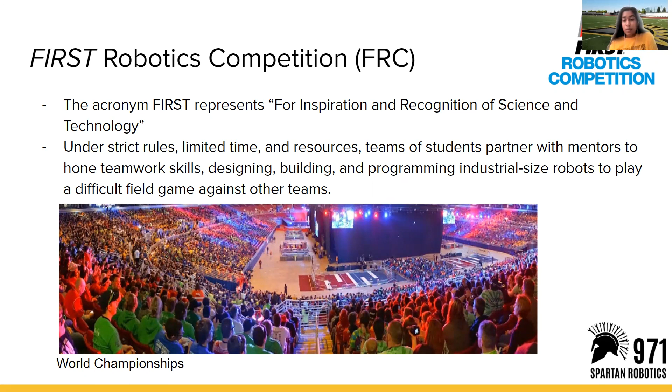Our school, Mountain View High School's FRC team is Team 971. Our team name is Spartan Robotics. 971 is a team number we were assigned by FIRST at the start of our rookie year in 2002. Currently, our team has about 30 students and 20 mentors. With all the hard work from within our team and with the support of our sponsors, some examples of them are NASA, Google, ORIS, Abbott, Lockheed Martin, SolidWorks, we are able to compete annually in about 6 competitions.

Every year, we get a new game that is generally played on a 26 by 54 foot field with an alliance of three 120-pound robots. This is our 2019 robot, nicknamed Tachyon, that we designed for the game that year.

The objective of the game was to put the orange balls seen in the picture inside the cargo ship and rockets, and then to place a hatch on the hull. At the end of the game, robots could choose to either not climb at all or climb to level 2 or 3, with 3 being the tallest and scoring the most points. In that year's game, we finished 4th overall.

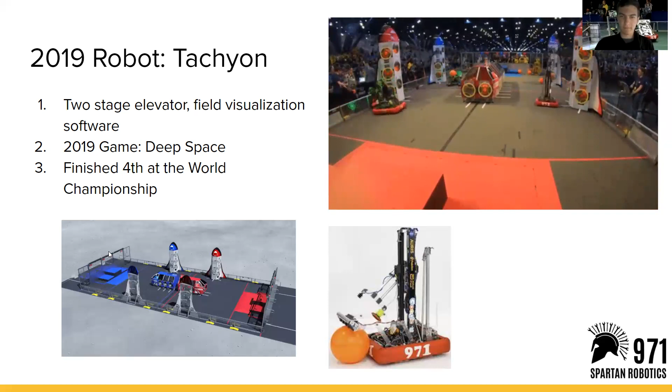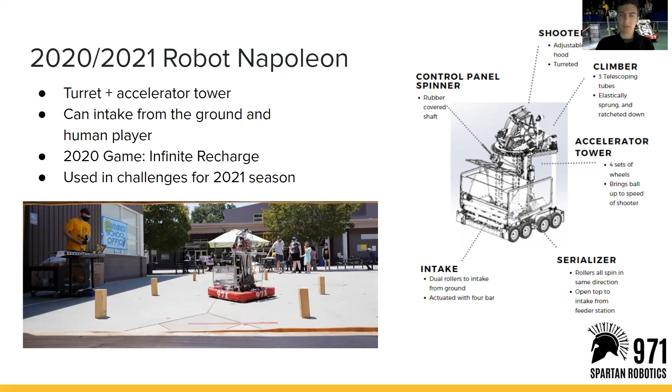Our team meets year-round, beginning with the official season, which goes from January through April. The official season begins with kickoff, during which the team gathers to watch FIRST reveal the year's game, and we begin planning our robot then. During the season, the team splits into specific groups to manage the various subsystems that are developed for the new robot. The robot is then developed in CAD and then built, preparing the team to compete at regional qualifiers to qualify and attend the championship competition.

After the championship, the team goes into the off-season from May to December, in which we build the third robot, which is named that because we build twin robots during the season. The third robot is a learning opportunity for newer members that join during the summer in the beginning of the school year. The off-season allows for the team to embrace these new members and provides countless opportunities for members of all grade levels to advance their skills.

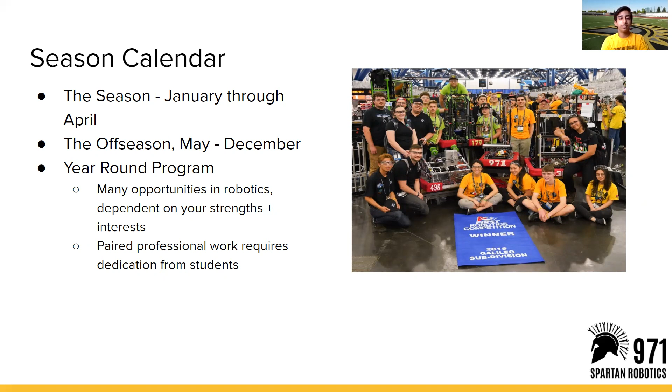So now we move on to our prototyping CAD stage. During this stage, we always start with brainstorming models and ideas of what features are necessary and what features we want. We first thoroughly research our game for that year, and based on the requirements and goals for the game, we start to list out different robot iterations to solve each in-game objective. After we gather a strong list of options, we filter the iterations until we are left with the most efficient and effective solutions to solve in-game obstacles.

After we determine feasible results, we first use CAD either in SolidWorks or Onshape to construct a 3D model draft of what we are building based on the ideas we discussed. Since we don't know which robot model is the best, we prototype different features on the robot to observe which one is the most compatible. During the prototyping stage, we manufacture our desired models based on our CAD using wood so that we can manufacture and assemble them easier without wasting resources and still produce accurate results.

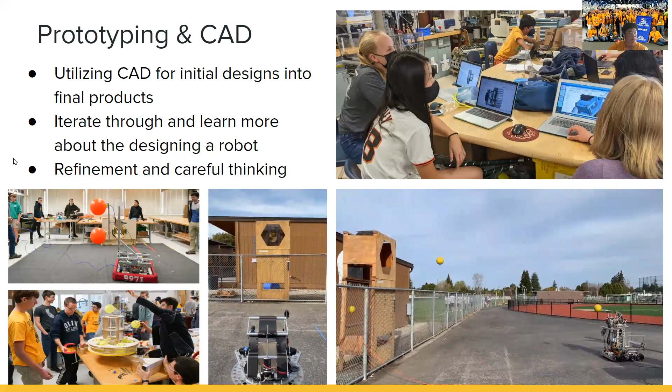So this is an example of the prototyping process of our 2020 to 2021 robot's shooter, also known as the Napoleon shooter. First, we prototyped the basic version of the flywheel to see if we could go forward with this idea, on the very left-hand side of the picture.

After we determined it was a good idea, we experimented with different surfaces on the flywheel hood and hood compression, changing different variations. We also added a tower to see if that increased accuracy. After that, we made different wheel configurations to optimize energy transfer between the motors.

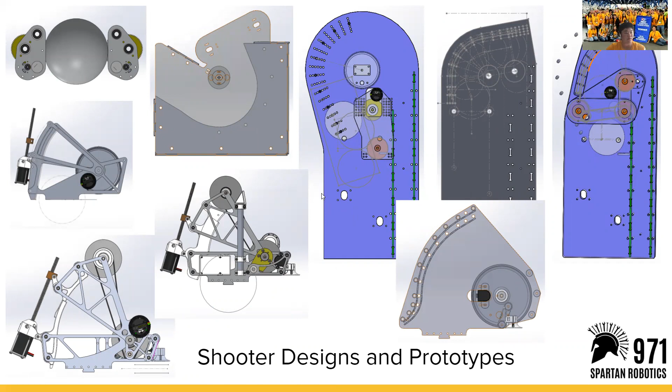After we finish creating a CAD model for a part, the next step is to fabricate it. We use a variety of machines to produce parts, including industrial grade CNC mills and routers, as well as 3D printers and lathes. We also do this under time-sensitive conditions, which prepares us for the real world, where there's constant pressure to perform to expectation.

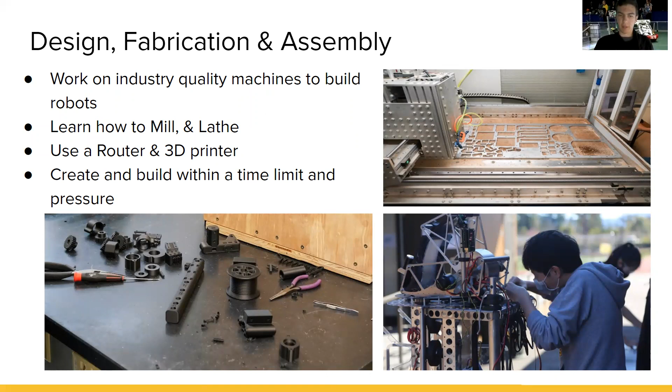Our team has an incredibly advanced software team. We use industry standard tools to build and deploy our code. This includes, but is not limited to, using Git, code reviews, and a re-implemented robot operating system to build and power the software components of our robots, which range from vision systems to autonomous systems. We even open source our code on GitHub, making software more accessible to other FRC teams and even major companies that use our code.

Although it is one of the most challenging aspects of the team, the industry professional mentors, many of whom built this team's software when they were students at Mountain View High School, collaborate and guide students to maximize their coding potential.

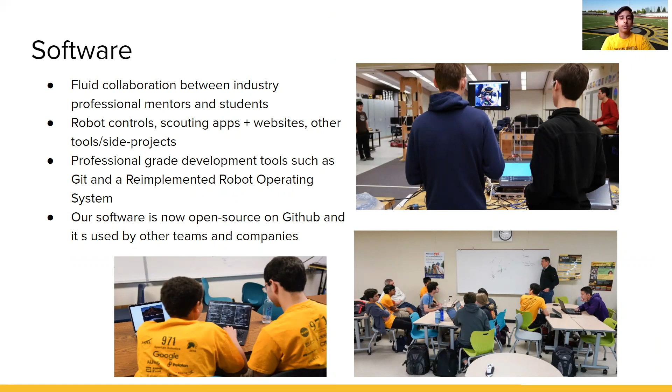So after software, we move on to competitions. These competitions are hosted after our 6-week build season, in the month of March. They are often very competitive and fast-paced, since around 30 to 50 teams come to one field to compete within 3 days. Our team often goes to 2 regional competitions, one in Silicon Valley and one in San Francisco.

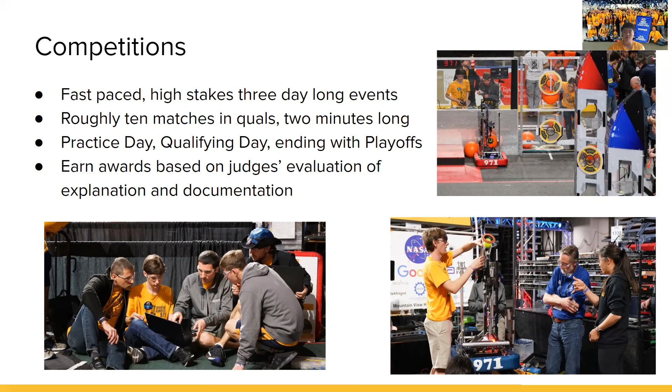However, if there are competitions that are filled, we fly to other states to compete. If we place first in one of the competitions or earn a qualifying award, we qualify to attend the championship event in Houston. However, in order to achieve promising results from these competitions, a major part which contributes to our success comes from scouting and strategy in our team.

These groups scout different robots during a competition using our team's integrated scouting website to record data. After we receive this data, we process the information and form strategies based on which robots from different teams perform well and which robots we want to recruit onto our alliance. Although this portion sometimes goes unrecognized, it is a very essential part which helps us place well in competitions.

For the championships, after our typical regional challenges, if we qualify for the championship tournament, we go to one of 2 events hosted in either Houston or Detroit. We go to the Houston competition to compete since it is in our regional division.

In this round robin tournament, there are 6 fields to play on, and the team that places first in each field moves up to the Einstein's competition, which consists of the 6 teams that place first and decides the world champion. These championships are well known and attract many teams from not only the US, but around the world. Our team has a strong history of often qualifying for these Houston championships.

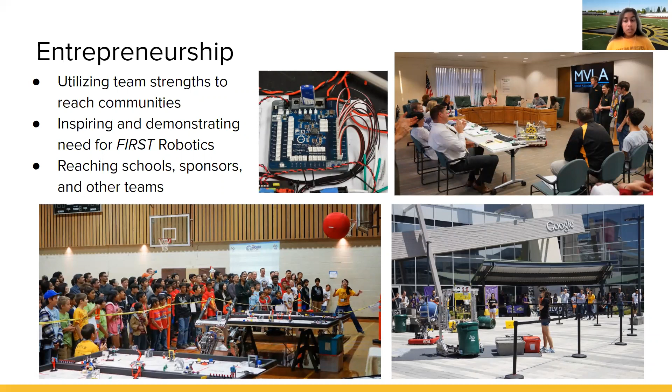A little bit more about entrepreneurship. This is where we use our platform and our strengths to help out others in the FIRST community. We also reach out to educate our community about FIRST and STEM in general. We mainly do this through robot demonstrations, presentations given at elementary schools, middle schools, sponsors, and through community events.

Our team has a long history of alumni returning to mentor the team. Many of our alumni come back as either adults or college students and bring skills they've learned from other teams and companies to help better our team. Additionally, our team has had 4 Woody Flowers finalists, which is a mentorship award for excellence that FIRST mentors are eligible for.

Our team strives to make robotics accessible and enjoyable for all students, while also competing at a high level in FRC. All students are encouraged to pursue the numerous opportunities given to them, and our goals are at the forefront of our endeavors and the basis for the team's incredible successes.

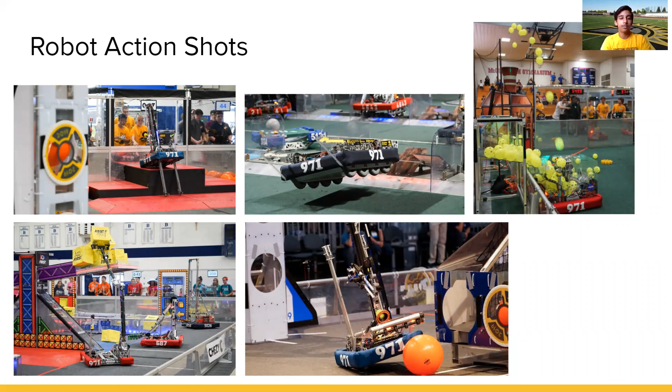While the past year was challenging, our team has continued to grow. Thanks to tremendous support from our community, we are looking forward to moving into our newly constructed lab at Mountain View High School in the coming weeks, and a normal competition season.